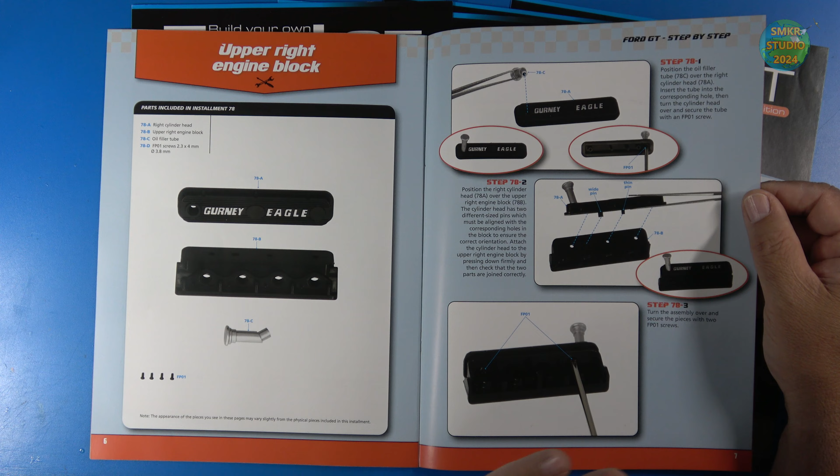Then it gets into the build part of the magazine, step-by-step instructions, very nicely illustrated, easy to follow, great write-ups on what to do in the build itself.

So there you go. Let's look at the parts that came with this pack. With this pack, I'll be working on the engine again. We'll be adding more components to the engine.

Stage 78 is the other valve cover and head. Stage 79, more parts for the engine, the front of the engine. Stage 80, the other half of the engine block. Stage 81 would be the exhaust system for one side, and stage 82, the exhaust system on the other side. Let's get started on stage 78.

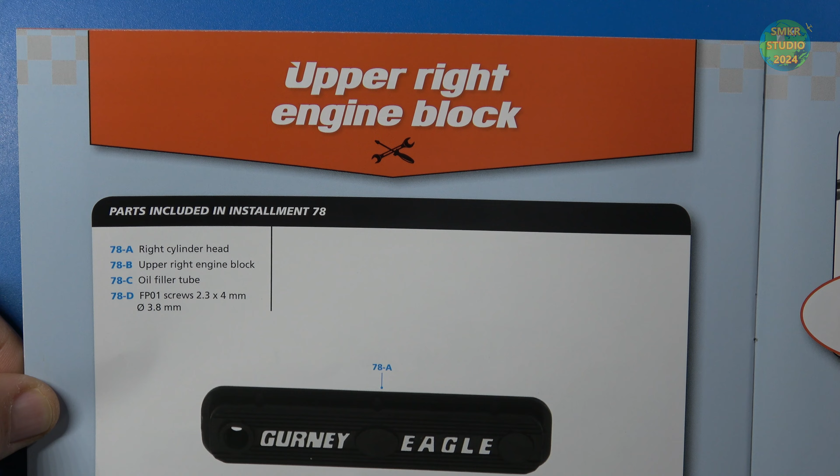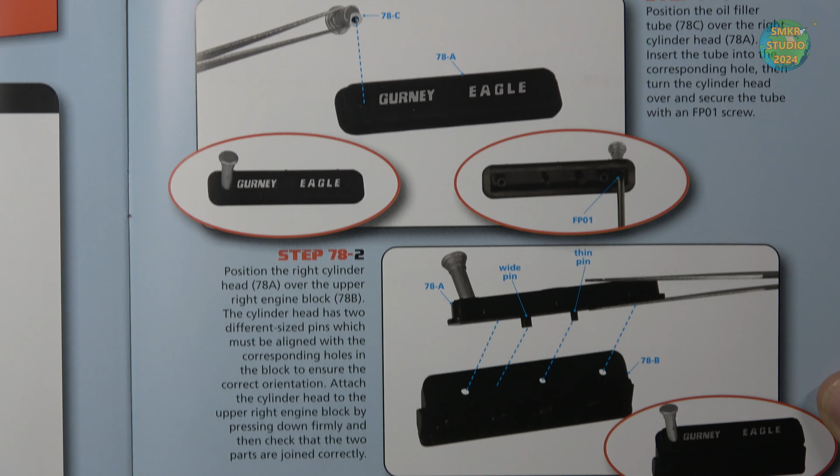Let's look at the build instructions for stage 78. Upper right engine block, and you can see these are the parts that were included: cylinder head and valve cover, breather cap. Install the breather cap on the cylinder head. Very simple there. And that's what it should look like.

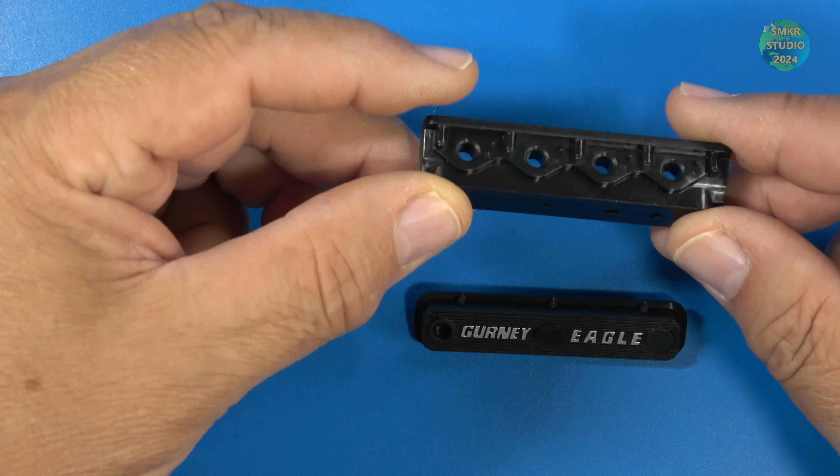Let me get the parts and I will be right back. Here's the parts for 78. I'll take this out, we'll get a closer look. FP01 screws. Here's the breather, the cylinder head, made of plastic, and the valve cover. I love the graphics on this. It's also made of plastic.

We're going to go ahead and install the breather onto the valve cover. Now it is keyed, so it only goes in one way. Just like that. Use one of the FP01 screws.

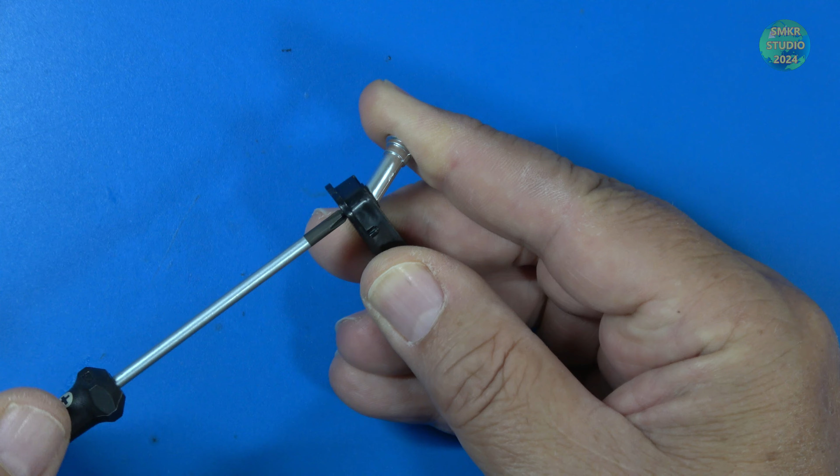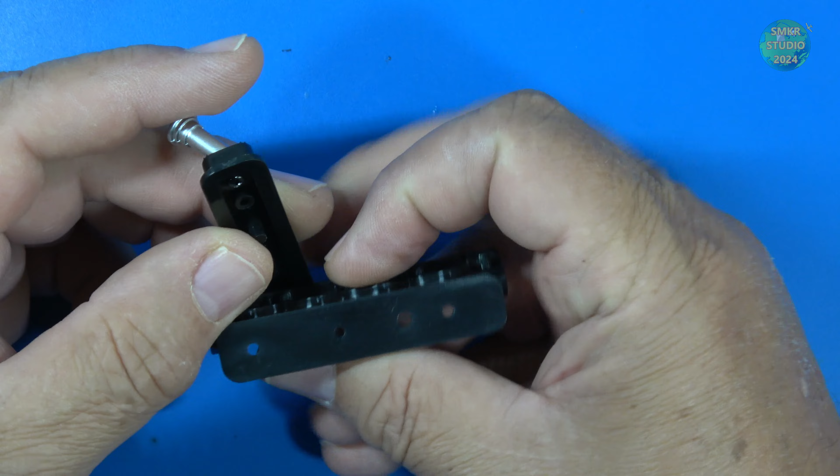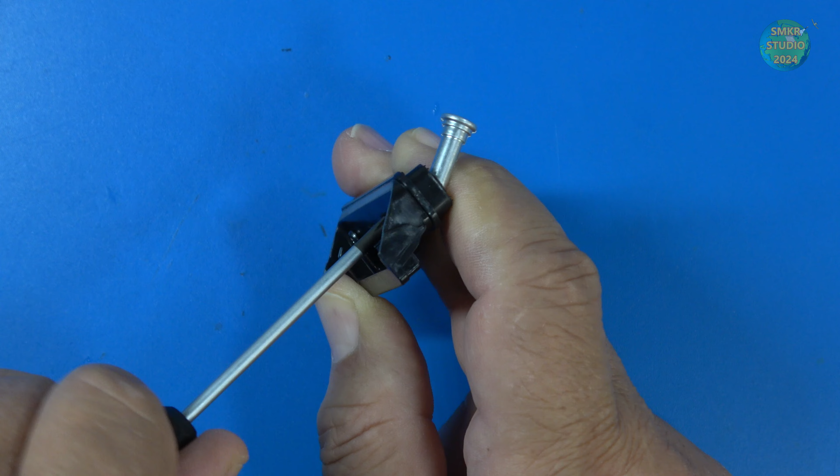That's good there. Then we'll bring over the cylinder head and we'll line it up. You'll note that on the cylinder head it has a large hole and a small hole, so we'll go ahead and line it up that way. 2 FP01 screws go into this from the bottom. That's good there, that's how that looks. That's all I do with stage 78. Let's go ahead and do stage 79.

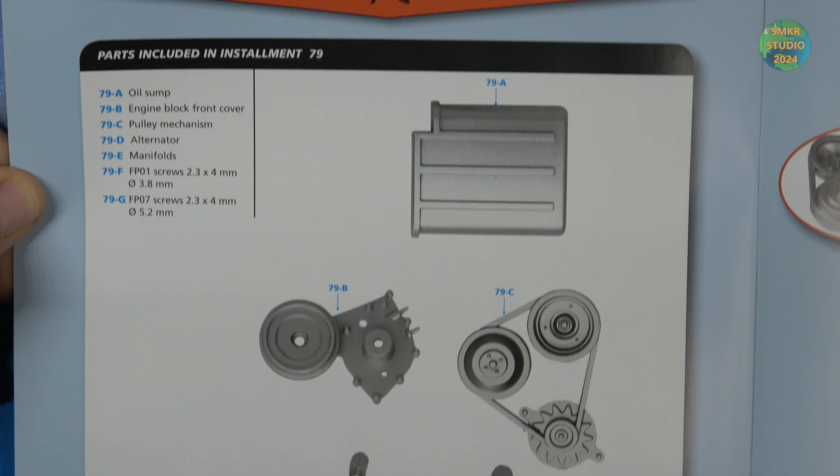Let's look at the build instructions for stage 79. This time I work on the front cover of the engine block and pulleys. Here's all the parts involved. Very cool there.

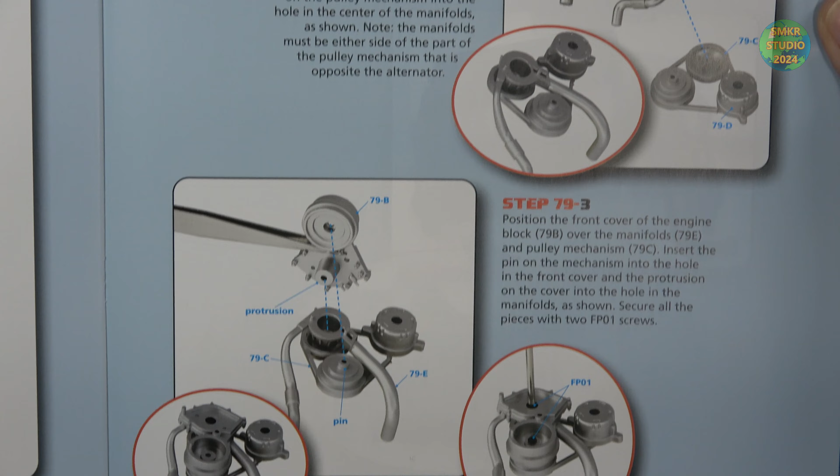Pretty easy to do here, nice parts and components here. And we're going to mount that onto the front of the engine block that we already have assembled, at least the front half that we have.

And the oil sump next. That's what that looks like. Let me get the parts and I'll be right back.

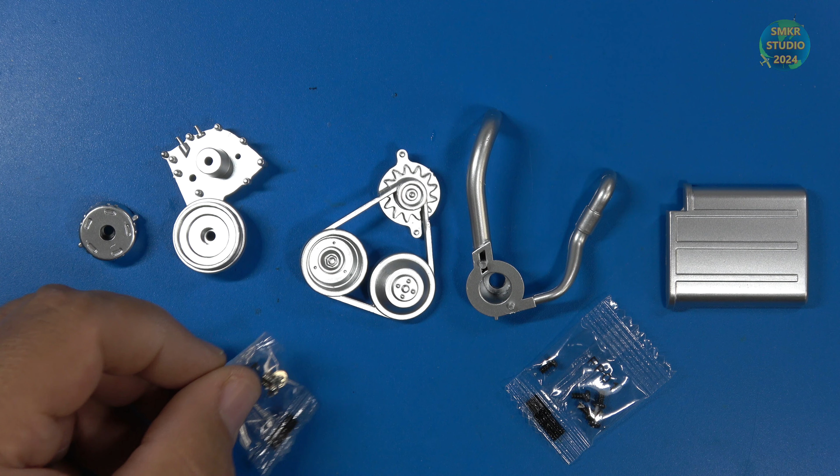Here's the parts for stage 79. Let's get a closer look. FP01 screws and FP07 screws. All the parts here are made of plastic and they look very nice. Very cool, has a great finish to it. Let's get started.

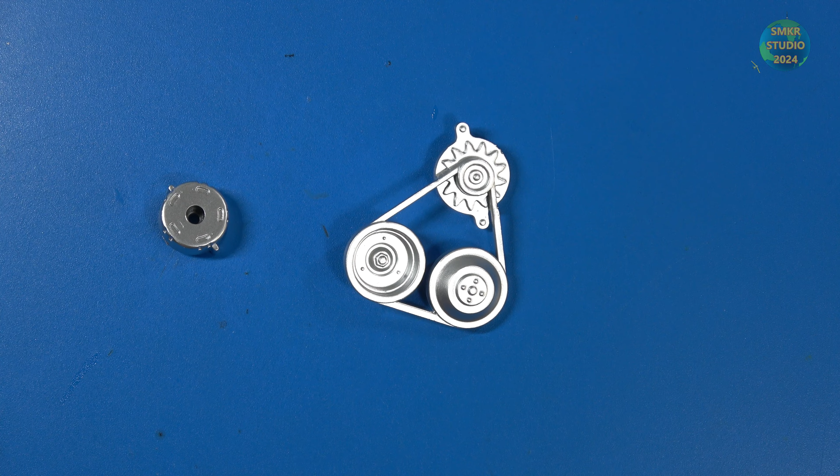Go ahead and install the alternator here and turn this over, and it's going to mount to the back side of the alternator just like that. The FP01 screw goes into that. That's good there, nice and snug.

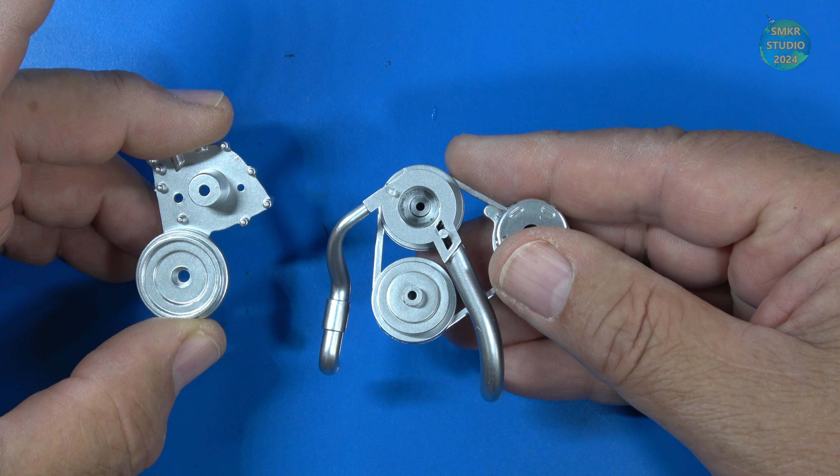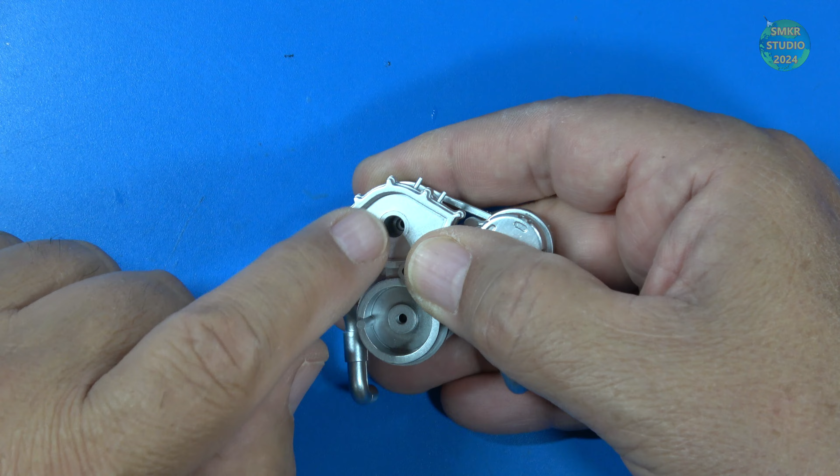Next we'll install parts of the water pump. So with the water pump, that's this right here. We're going to insert this just like that. And we're going to grab our next part here and put that down on top of it, like that and like that. That's cool, I like how that looks. And we'll put in 2 more FP01 screws right here. That's good there, that's how that looks there. That is very cool.

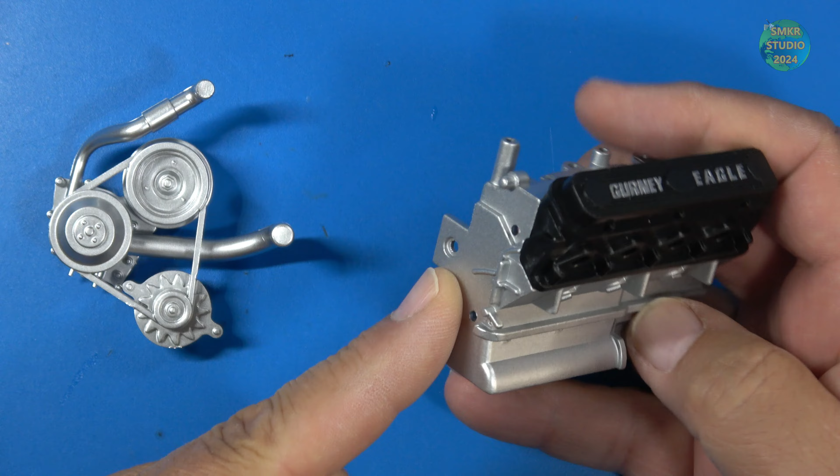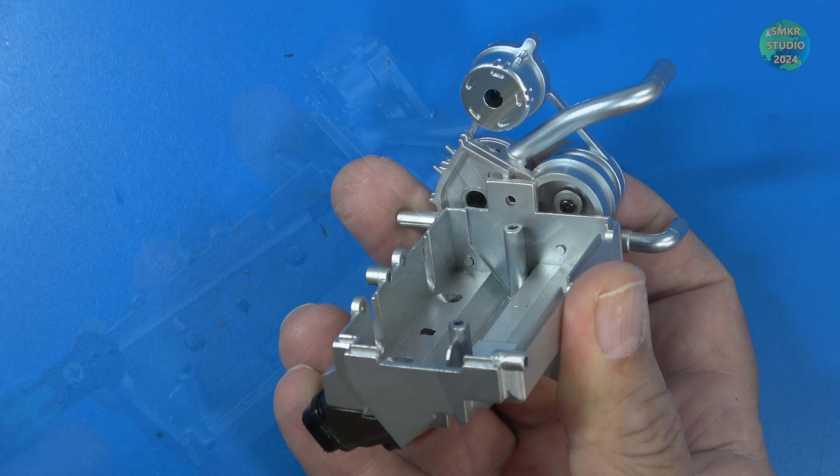Bring over our engine block, the half that we assembled in stage 77, and we're just going to simply mount this just like that. That's how that looks there. And we're going to put another FP01 screw in on the back side. And that's fantastic, wow, very nice.

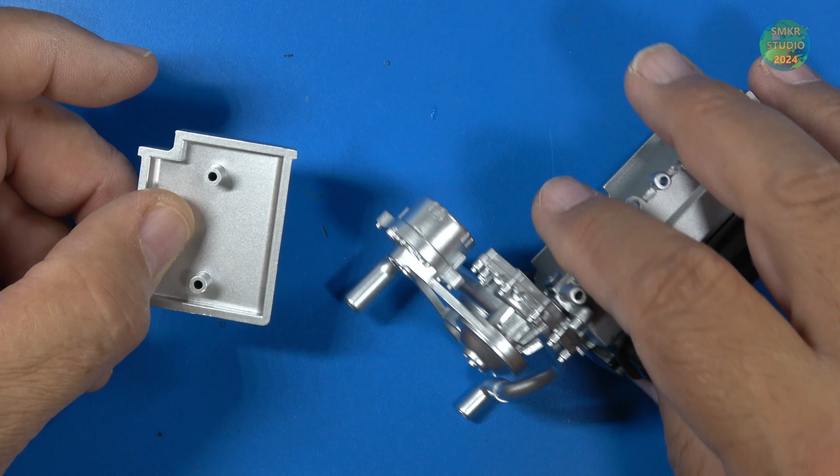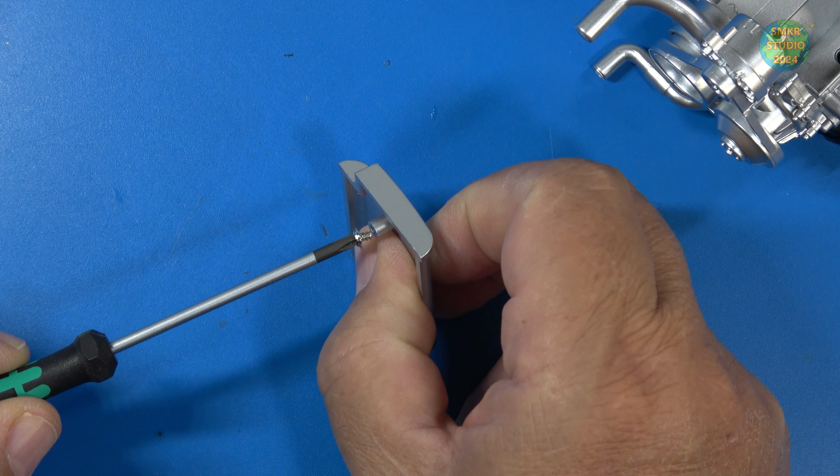And one more thing, we're going to prep this to install a little bit later. I'm going to go ahead and put 2 screws into this. These are the FP07 screws. These screws do have a flange, so we're going to screw those down. And that flange will hold it in place a little bit later when we install the other half of the block. There we go, and that is our oil sump complete.

And that's all I do with stage 79. Let's head over and do stage 80.

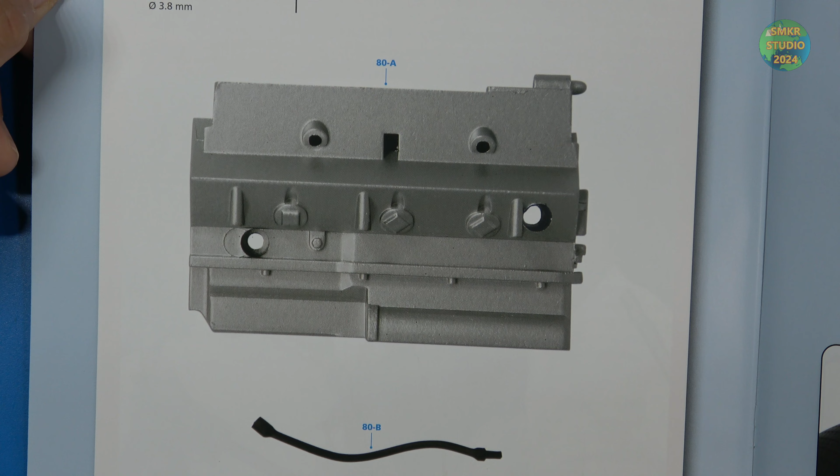Let's look at the build instructions for stage 80. This time it's the right side of the engine block. And here's all the parts I received. Did receive a hydraulic brake hose.

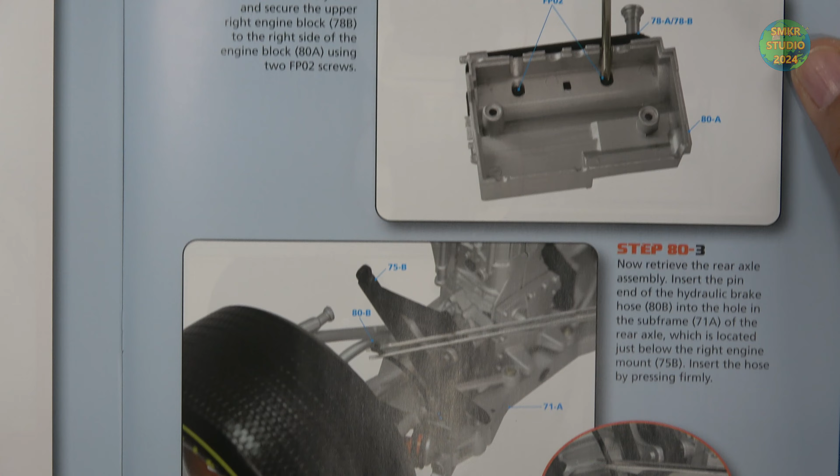We'll go ahead and assemble the other cylinder head onto the engine half. And then we're going to install that brake hose on the other side of our rear suspension subframe. Make sure everything is secured in place. May have to use a little super glue on that.

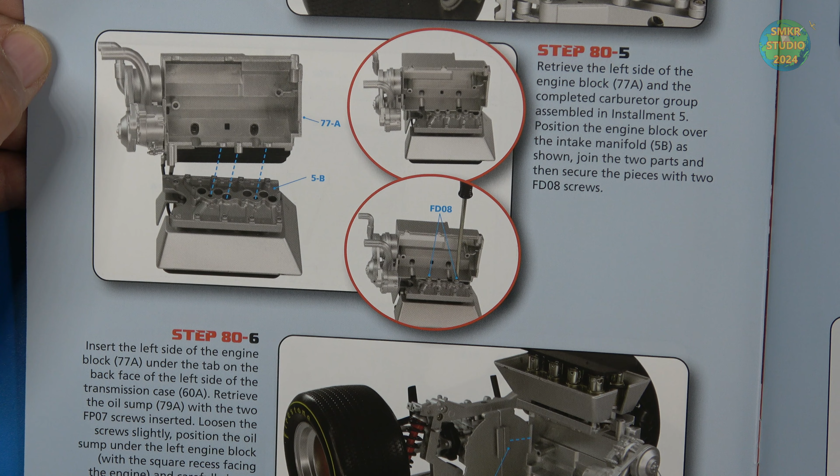Go ahead and put the 2 engine halves together, and we'll put some screws in there to hold everything together, along with our upper intake manifold. Very cool. And then that looks like we're going to put on the sump.

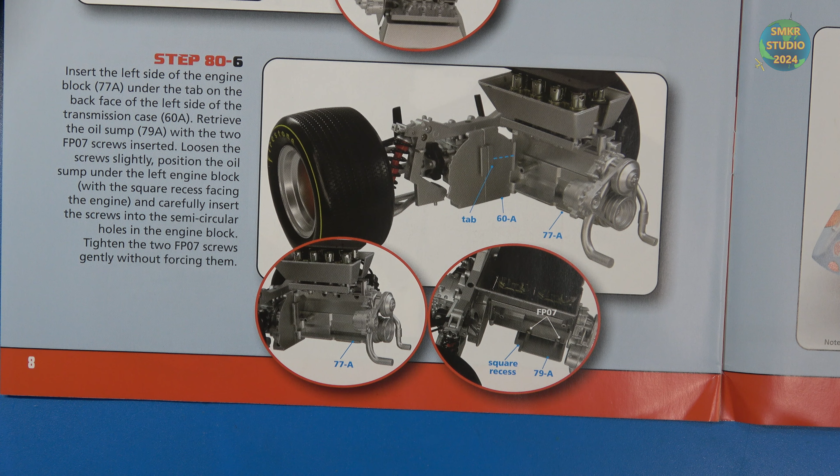Looks like we screw everything together there onto the rear suspension subframe. So this is going to be fun here. Let me get the parts and I will be right back.

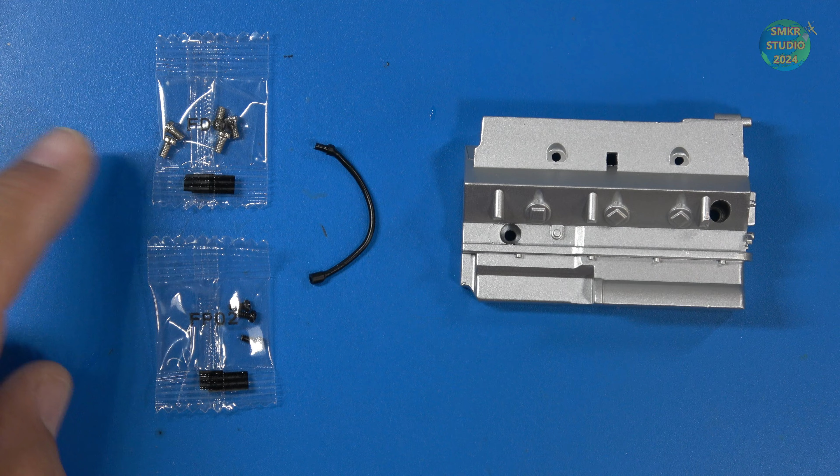Here's our engine block for 80. Let's get a closer look. FP02, FD08. There's our hydraulic line and our other engine block, which is made of metal. Very cool.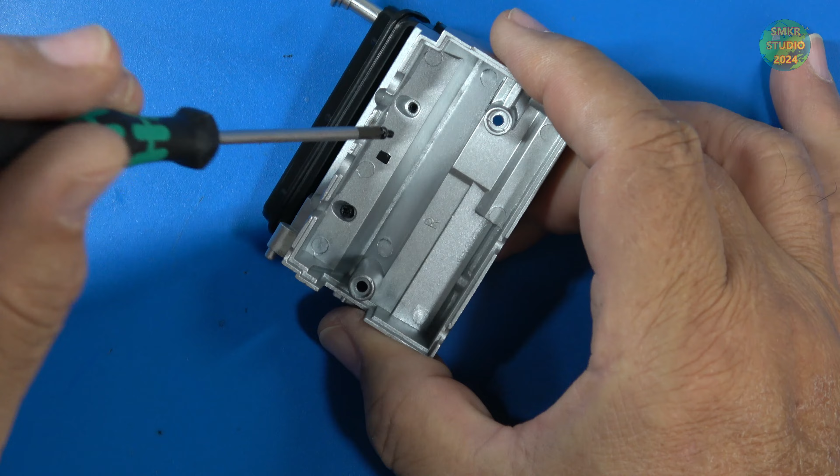First thing I'm going to do is install the cylinder head on here. It does have an alignment notch, and 2 FP02 screws will go into this. The screw goes in at an angle. We'll put it in the hole here first, and then put the screwdriver through that slot, and then drive it in. That's good there, they're both in. That's how that looks there.

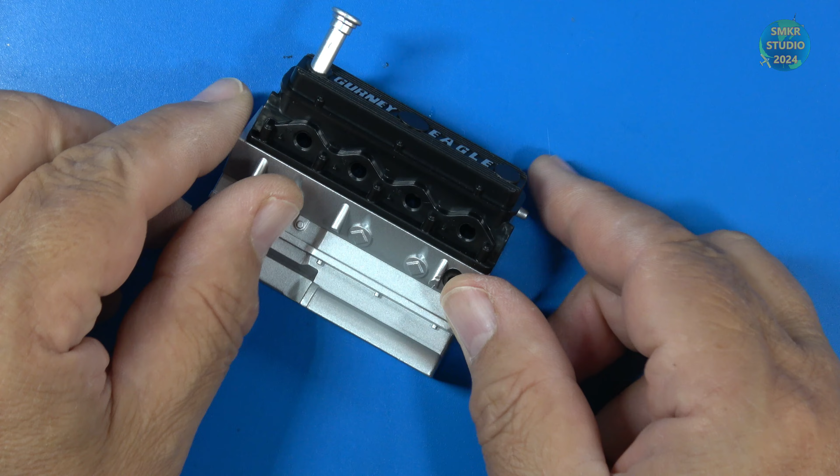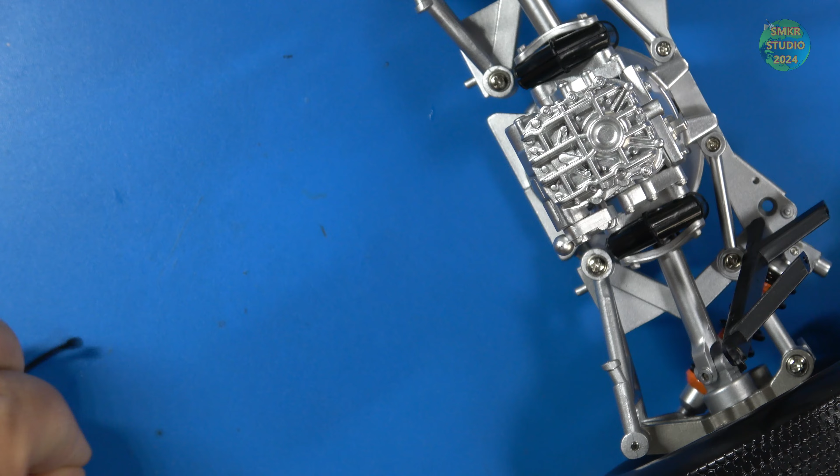Now we'll bring over the rear suspension subframe and install this hose. And it's going to go in right there. Just see the hole right there, that's where it's going to go into. There you go, there's the line installed. I found it easier to install it by removing this support brace here, and I'll just reinstall that now that the line is put back in. And there we go, everything's back together.

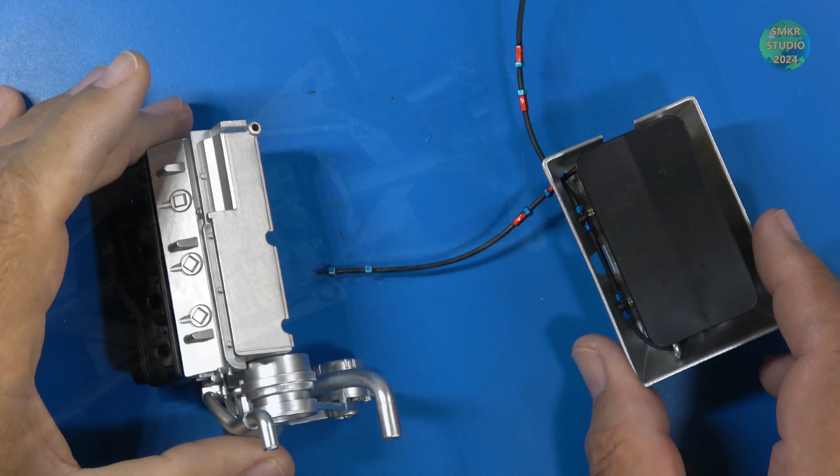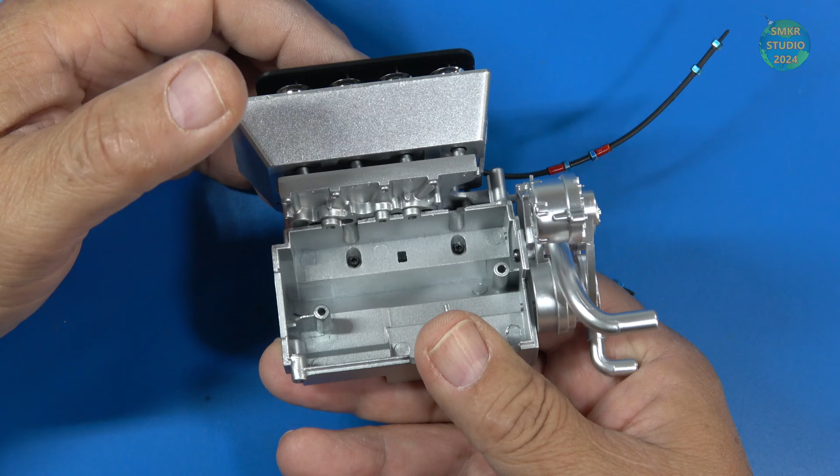Alright, so I brought over my intake manifold. We're going to mount that onto the top part of the engine here, and I believe it's going to go down. You have a slot here for that tube, and that's just going to go down. You can see this is going to slot in there just like that, and 2 FD08 screws go into that, and the next one.

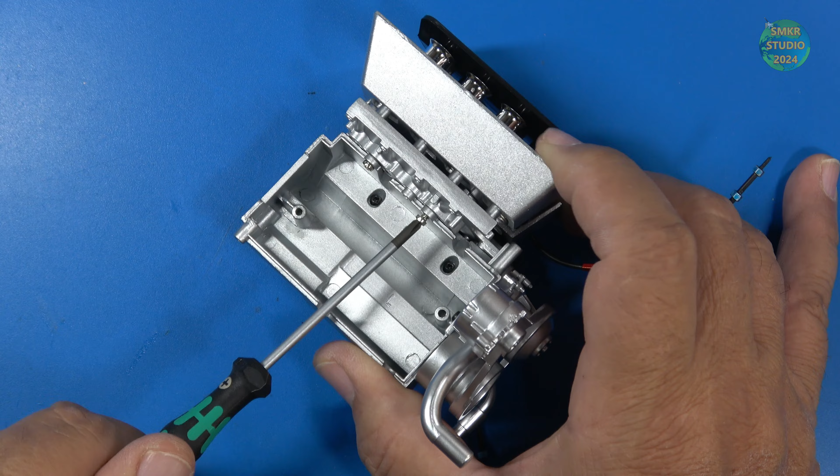That's good there. That's how that looks there. Mount it up. Looking great.

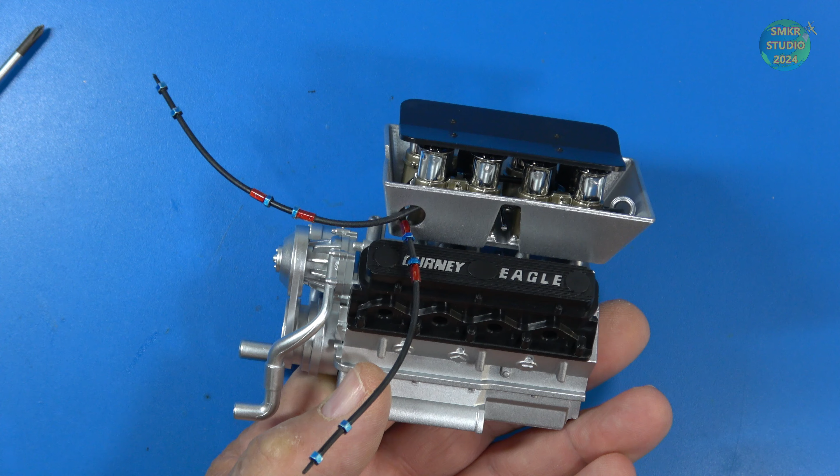The oil sump, and then we'll slot that in. And we're going to sandwich in this part. Just like that. That's cool.

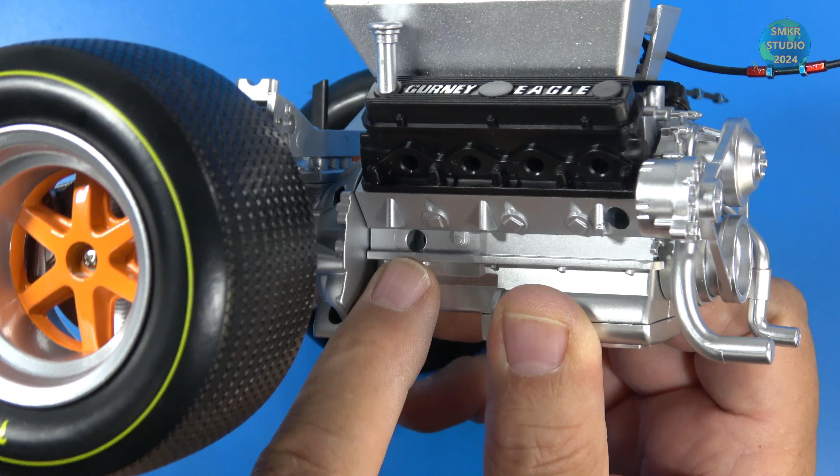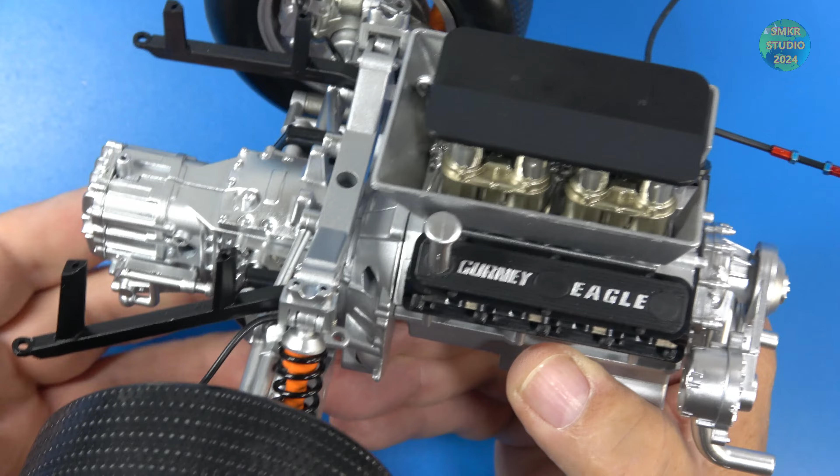We're going to put in 2 FD08 screws. And that's good there. Wow, very nice.

And there you go, that completes stage 80. We have the engine mounted on the subframe, and it looks to be assembled very nicely. We did put the oil sump on it on the bottom here, and that looks very nice. Very impressive. So that's all I do with stage 80. Let's head over and do stage 81.

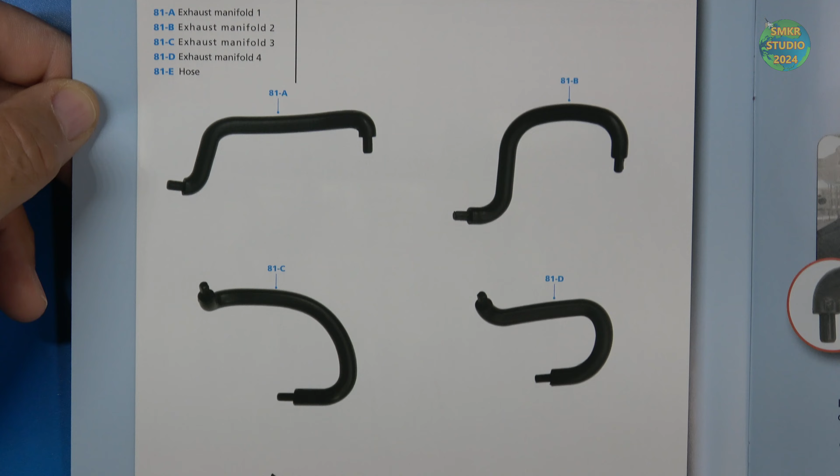Let's continue here and look at the build instructions for 81. We're going to be assembling the right-hand exhaust manifolds. You go there, the parts. And that's what that looks like there.

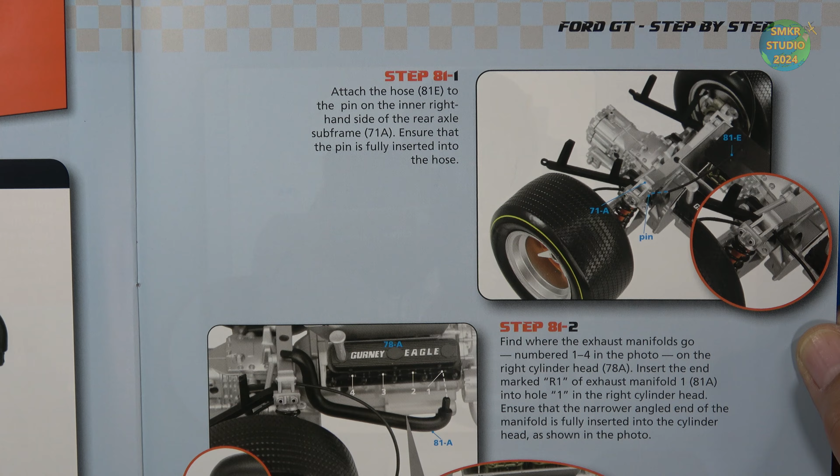We're going to install the inner right-hand rear axle subframe. And that's the hose there, that small hose. And route that where it needs to be routed.

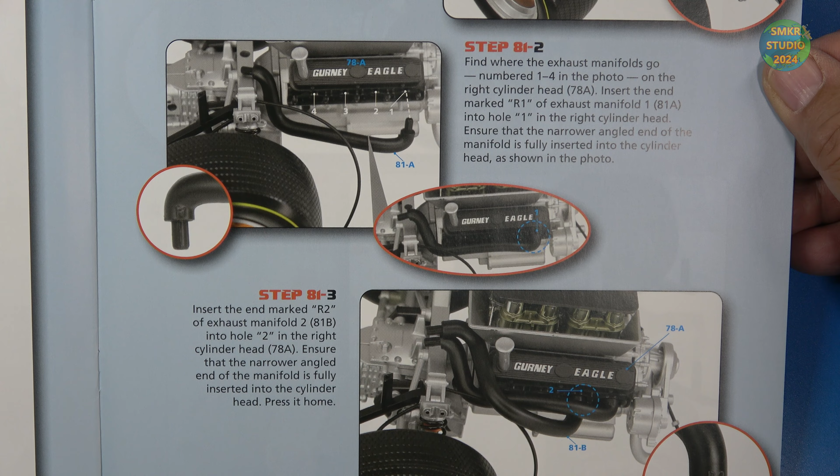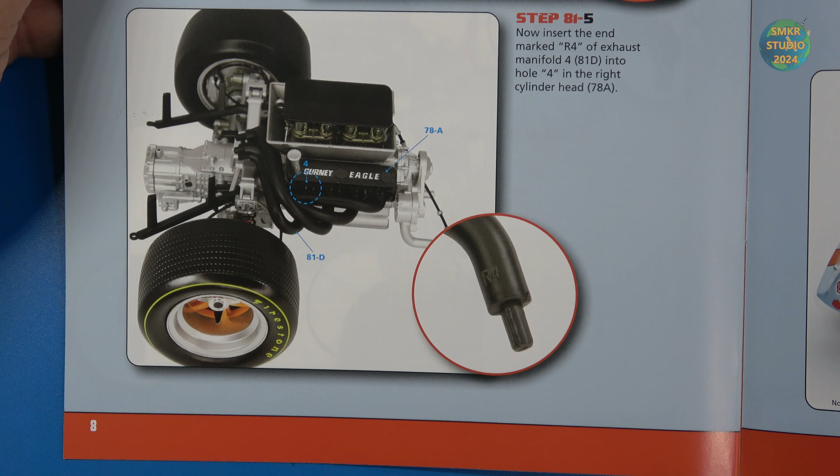You can see the exhaust manifolds are numbered 1, 2, 3, and 4 from front to back. They illustrate number 1, number 2. Install number 3, and lastly number 4. And the manifolds are marked, it looks like. And that's what it will look like. Let me get the parts and I will be right back.

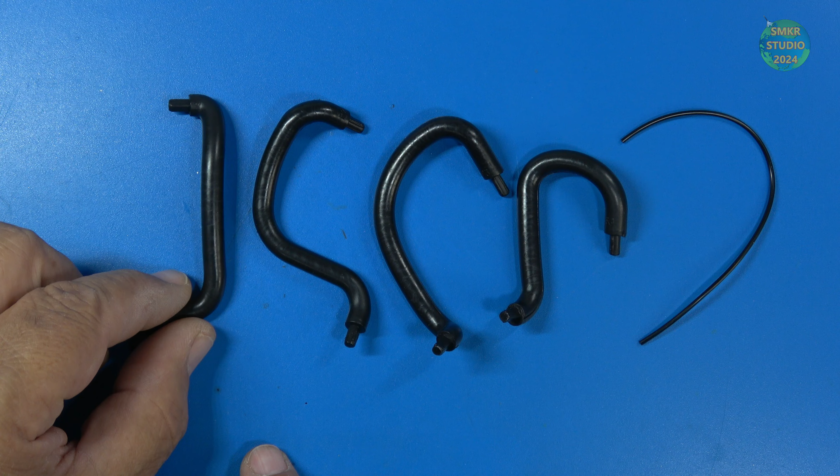Here's the parts for 81. Let's get a closer look. Here's that small hose and our exhaust manifold. They are marked with R1, R2, R3, and R4, and they are all plastic.

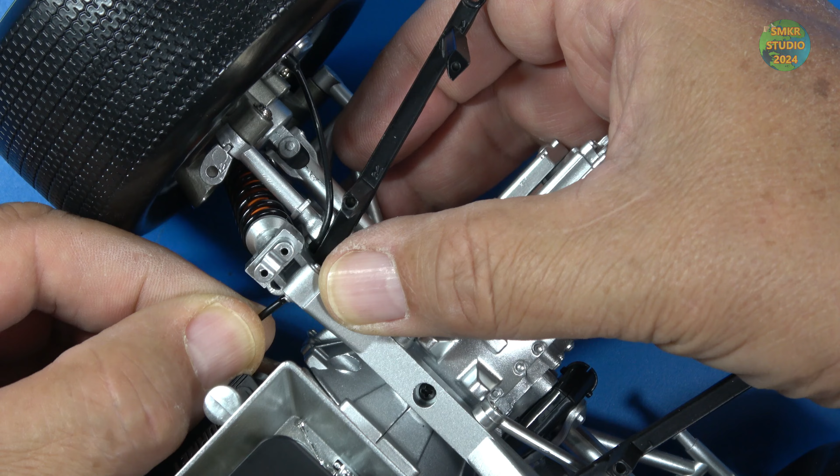Alright, so I brought over the subframe and engine, and we're going to mount this hose to this pin on the inner right hand side. You can see that where I have the hose going to. I'm going to put a little super glue on it. And there you go, it's installed. We'll let that dry a little bit.

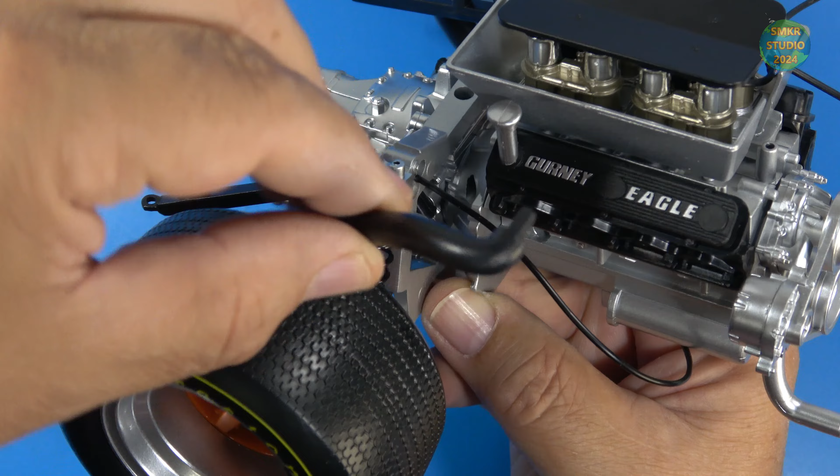Grab the exhaust manifold that is marked with the number 1, and that's going to go in the very first slot, just like that. Next is number 2, it's going to go right beside it. Number 3. It took a little coaxing to get those all in place there, and you can see that. If you look on top, you want all 4 coming together on top of each other, stacked, leaving them loose because they got to line up with the exhaust manifold.

Very nice, so that completes stage 81. Let's head over and do stage 82.

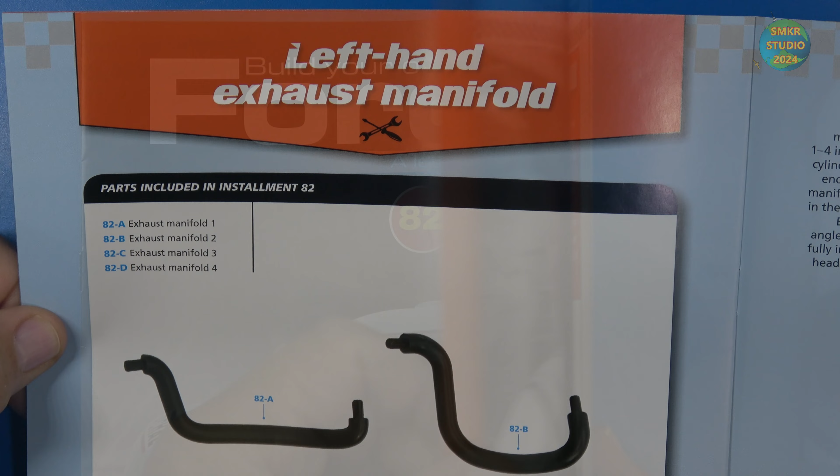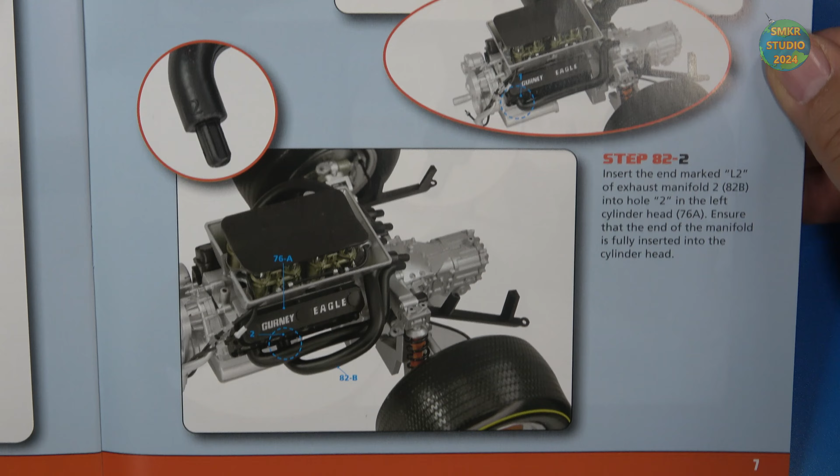And welcome back to the final stage for pack 17, stage 82. Just like stage 81, we're going to install the left-hand exhaust manifold. It's going to be done much the same as before. And like I said, the manifold pieces are numbered 1 through 4, and they go in that order. Very simple.

Let me get the parts, I'll be right back. And here's the parts for 82. Let's get a closer look. L1, L2, L3, and L4. These are made of plastic just like before, and I'll install those and I'll be right back with them installed.

And just like before, number 1 will go right here, number 2, number 3, and number 4. And there you go, all 4 are installed just like the other side. You can see they stack up on top of each other, and that's how they look on the back side there.

Very cool and very easy to do. So that completes stage 82.